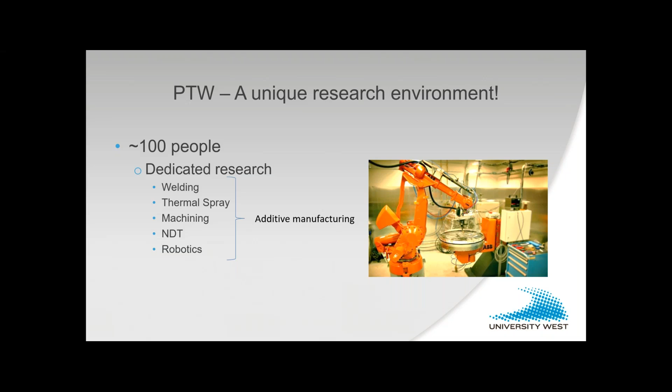The AM processes at University West are basically what you see here. We do a fair amount of laser metal deposition using wire as feedstock, but also with powder as feedstock, the blown powder process. Together with others, we have a fair amount of projects also on powder bed fusion based on the laser source. We have an in-house system on electron beam powder bed fusion, an A2X machine from Arcam, and we also do wire arc additive manufacturing, not least together with ESAB in Gothenburg.

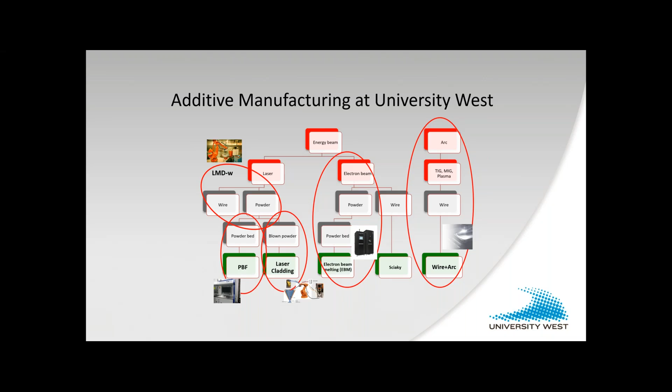Within our research environment, as I highlighted, we do welding-based AM as well as powder bed fusion. The welding-based AM is primarily direct energy deposition using either wire or powder, and we also do wire arc additive manufacturing. We also do a fair amount of testing to gain more fundamental understanding of what's going on during this type of processing, not only for welding-based additive manufacturing but also for the powder bed fusion processes.

With regard to the blown powder process, we have one key-ready system from Trumpf, as well as one system that we put together on our own based on gantry systems. At the moment, we have 2 PhD students working on the blown powder process.

A separate welding cell based on direct energy deposition using wire as feedstock is a process we started working on around 2006. At that time, we began developing this specific deposition technology on titanium, together with the former Volvo Aero, nowadays GKN Aerospace. GKN Aerospace actually developed the technology to the point where it's been flying for several years now. So that has been very successful.

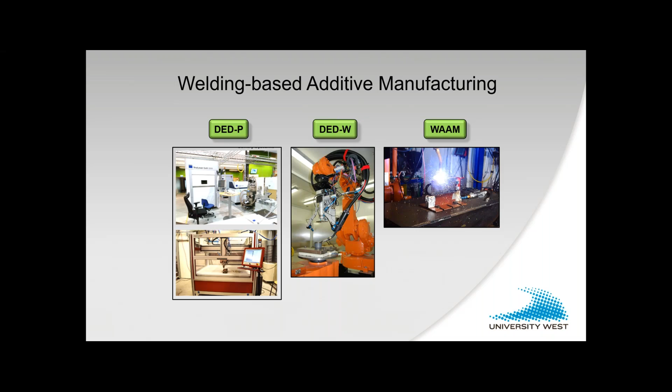As I highlighted just a couple of slides ago, we do a fair amount of testing, not least weldability type of testing. I believe you had a talk by Professor John Lippold in the Gleeble webinar series, and I'm sure he went through this, but we acquired a new Gleeble 3800D system, I think it was in 2016, and we've had several PhD students dedicated to this system. I'll touch on that later in this talk, but primarily with regard to strain-age cracking.

Another thing that is very close to my heart is Varestraint weldability testing. This is more or less solely dedicated to hot cracking - cracking mechanisms that could occur during welding. We are one of the few labs in the world who can do this type of Varestraint testing coupled to laser welding. So we do both laser-assisted Varestraint testing as well as arc-assisted Varestraint testing, and have several PhD students working on this.

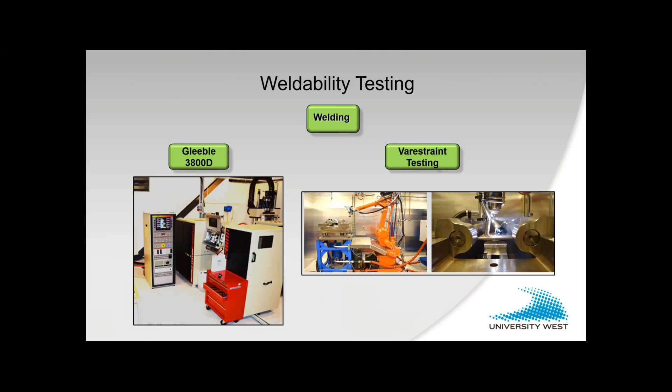For powder bed fusion, as I said before, we do both laser as well as electron beam powder bed fusion. At the moment we have two students working on the laser-based powder bed fusion, and about four students working on the electron beam process.

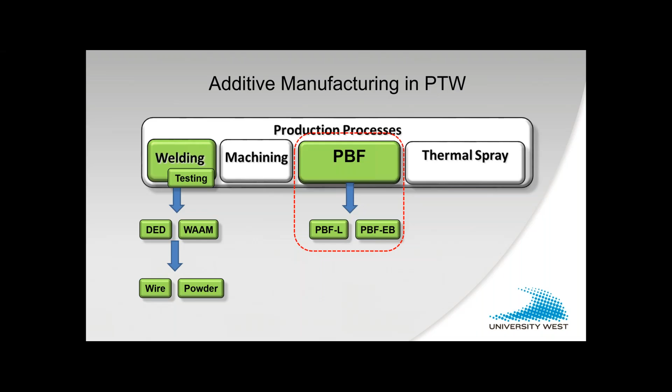The laser-based work is in collaboration with others, not least RISE, which is a research institute in Gothenburg, whereas we have an in-house system, an A2X machine from Arcam. For the powder bed fusion, both laser-based and electron beam, what we do is work primarily on the nickel-based precipitation hardening superalloys.

For the laser-based system, right now we have some work on the 247LC alloy, which is a very high precipitation hardened superalloy. For the Arcam machine, we do a lot of work on alloy 718, the workhorse within the aerospace engine materials.

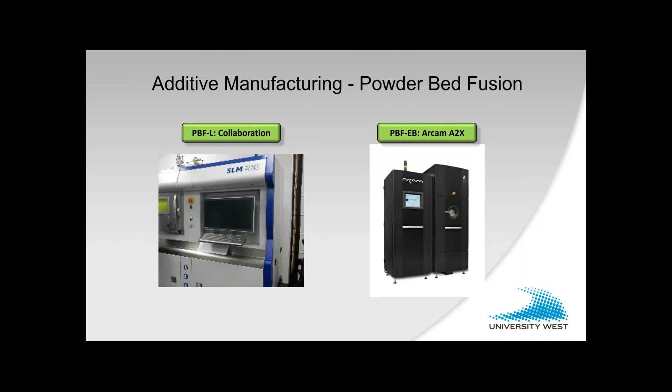So are there any interest in additive manufacturing? I guess the obvious answer is yes. If we check the number of publications versus years, we can see that there has been a tremendous boost in the amount of publications for additive manufacturing, exponential growth. So it seems like a lot of people are working on AM.

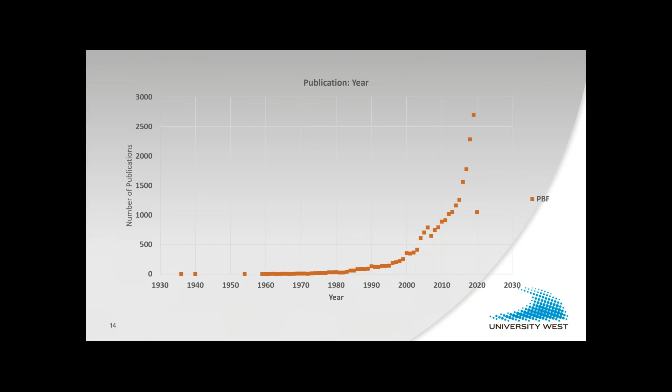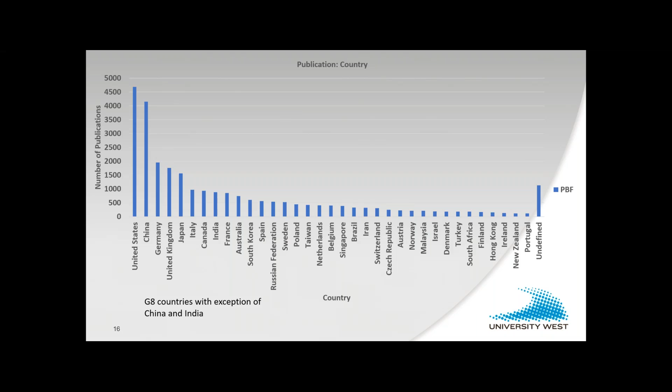But you might be aware of the fact that a big and promising market, not least for powder bed fusion, is aerospace. When you look at powder bed fusion as coupled to superalloys and compare that to the overall amount of publications within powder bed fusion, the amount connected to superalloys is significantly less compared to what's going on overall.

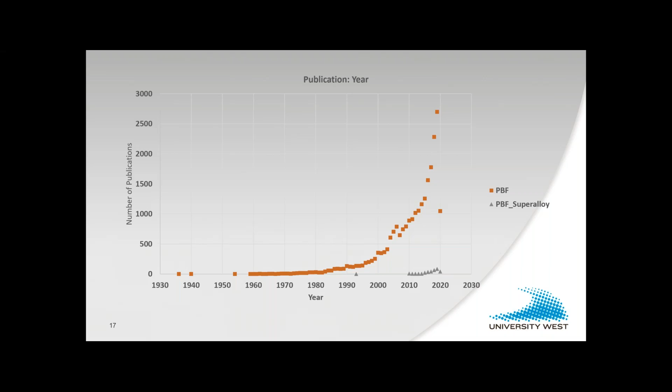But nevertheless, it seems at least to be a dramatic increase also in powder bed fusion connected to superalloys, as also seen for the publications or research carried out for all other materials.

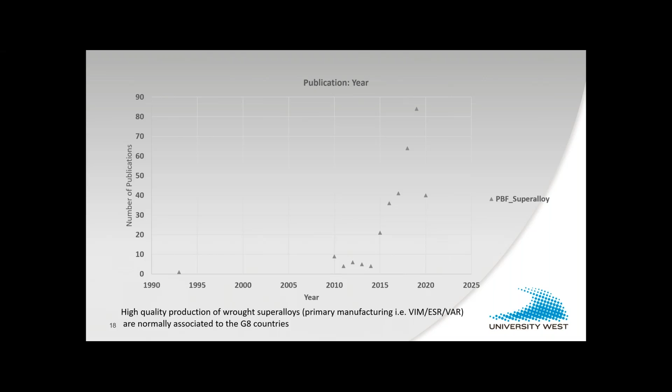If one considers or goes back historically to look at high quality production of wrought superalloys, which basically requires for critical components - let's say rotating turbine discs, etc. - we always require triple melt sequences regarding the primary manufacturing sequence, like vacuum induction melting, electroslag remelting, and vacuum arc remelting. These types of processes and production are also normally associated with the G8 countries. So this is actually true also for powder bed fusion connected to superalloys, but here with the exception of China and Sweden.

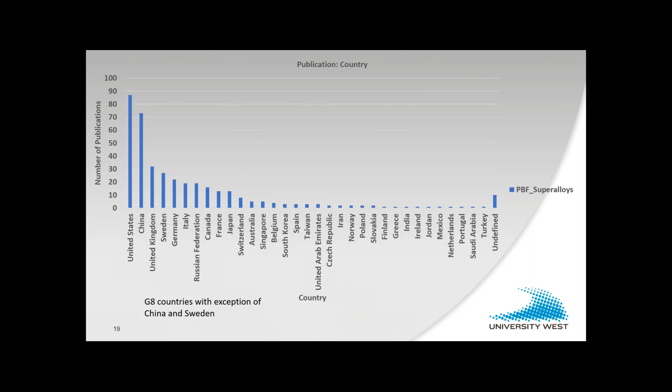An interesting thing I would like to tell you about is the history of powder bed fusion here at University West. Roughly 3 years ago, we decided to go all in, so to say, on research regarding powder bed fusion of the workhorse material 718.

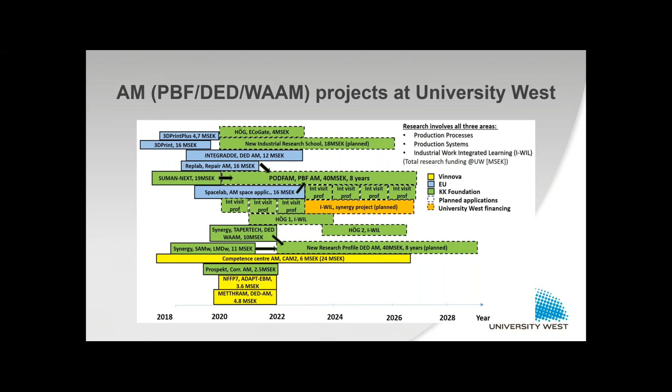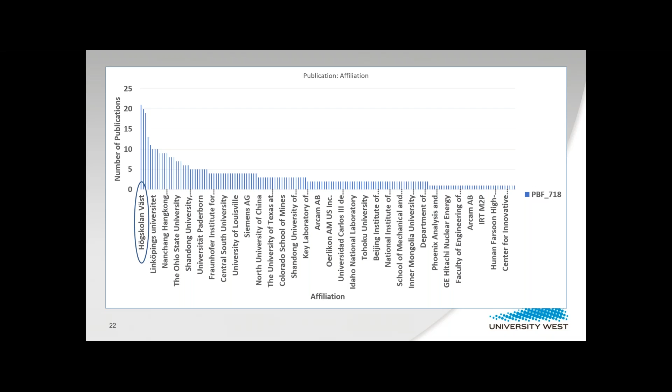So what are the drivers for additive manufacturing? Well, when considering aero-engine or aerospace applications, light and strong materials are required for a successful flight.

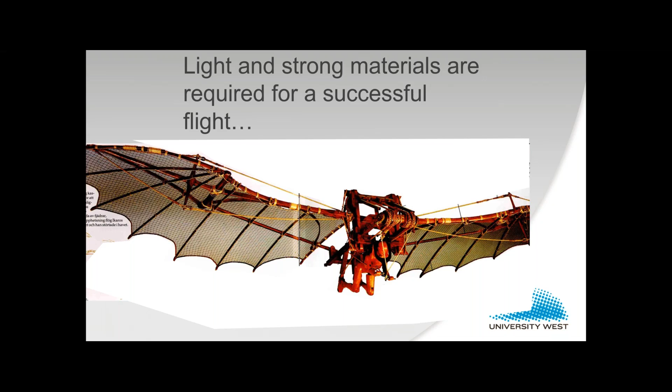There was one guy who figured this out many years ago and designed this machine. Maybe you know who it is—it was Leonardo da Vinci. He realized that in order to bring something up in the air, we need light and strong materials. The Wright brothers realized this too, but they were very lucky—extremely lucky—because the engine block they made for their engine was cast aluminium, and the material hardened by coincidence. That probably was one reason for their successful flight.

So light and strong materials are very important for aerospace. And a driver related to that is to make things hotter and better. If we consider superalloys, specifically the precipitation hardening nickel-based superalloys, one ambition is to use materials that can sustain a higher service temperature compared to the standard workhorse 718.

One way to accomplish that is to add more aluminium and titanium to the chemical stew. Aluminium and titanium push up the amount of hardening phase, specifically the gamma prime strengthening phase. The problem is that if you push the gamma prime content up too high, you get very bad processability, or a very high risk of cracking—not least strain-age cracking. So it's always a balance between service performance and processability when you develop a new alloy.

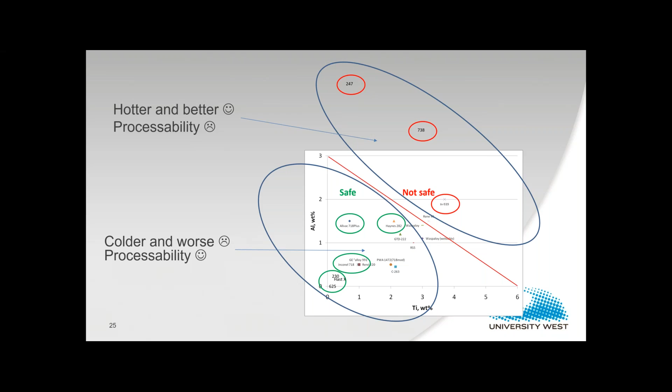Meanwhile, it also suffers from a fairly high temperature. But there is a lot of welding required to build this type of component—roughly about 60 meters of weld is needed to actually build it.

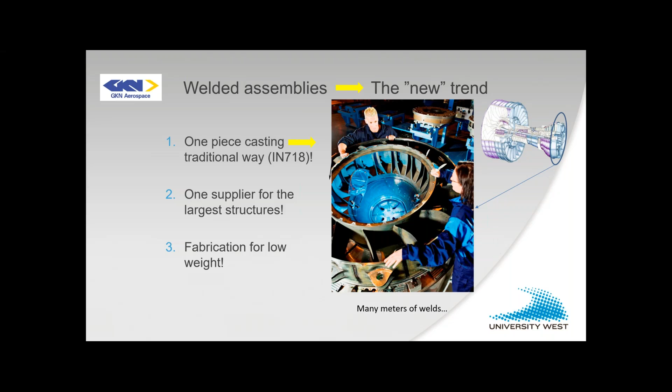But then another concept comes into play: every material form, like forgings or castings, has its inherent history and susceptibility to cracking, for instance. AM is also a new type of material form.

If we consider the size of the production chambers for powder bed fusion, we realize that the chambers are quite small, and we need to utilize welding to produce these larger components. So welding of AM-produced parts is extremely important, and that's an area which has not been really fully explored.

We recently had a student who graduated during the springtime, Tahira Rasa. She's now continued to work as a lecturer here at University West. She looked into restraint as well as Gleeble testing of AM-produced, powder bed fusion produced alloy 718.

We could see, for instance, that it's very important to connect the way you build the part, which will affect the grain morphology and grain orientation of the AM part. You need to think of the build direction and connect that to the weld preparation later, because the grain orientation and grain size significantly affect the weldability of the material.

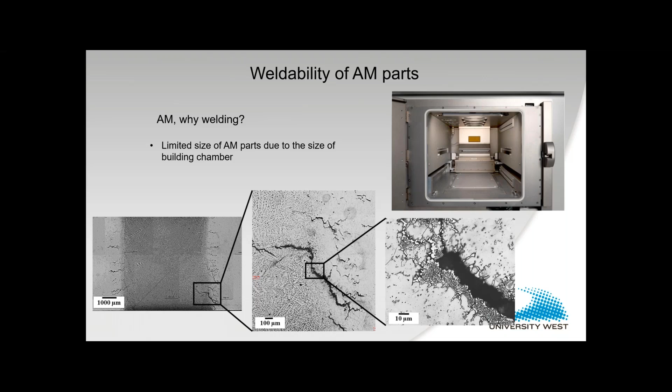That brings me to weldability, and I'm sure other speakers have touched on this before. Basically, weldability can be a bit arbitrary—you have to be careful when you use it, so you define what you mean by it. I stole this definition from the American Welding Society, which refers to three different categories.

The first is metallurgical capacity—basically how easy or hard it is to weld something without forming any deleterious constituents. The second deals with mechanical soundness, referring to how easy or hard it is to join or weld something without forming any discontinuities, pores, shrinkage, slags, or cracks. The last refers to serviceability—how the weld will perform during service.

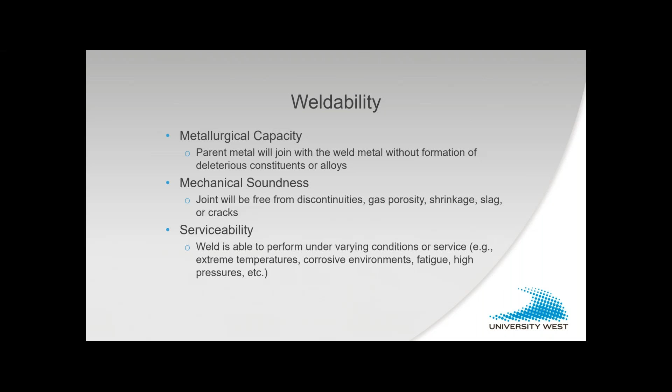From our research perspective, most of the research projects we have refer to weldability, and specifically to cracking susceptibility.

When dealing with cracking susceptibility in superalloys, it's primarily hot cracking that could be at stake during welding, associated with the liquid phase, as well as strain age cracking. Strain age cracking is also at high temperature, but it doesn't necessarily involve the liquid phase. Cold cracking could be a concern, but it's not a big issue with the superalloys.

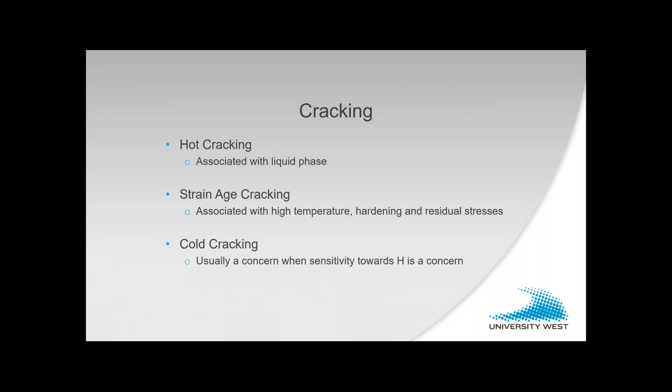So here today I will focus more on strain age cracking. Basically, strain age cracking is highly connected to the precipitation of hardening phases in the precipitation hardening nickel-based superalloys.

One could say that the standard grade alloy 718 was developed in the past because the industry suffered severely from strain age cracking in Waspaloy and other alloys, and demanded a new alloy with less propensity towards strain age cracking. Alloy 718 is more or less immune to strain age cracking, but that's because it's primarily strengthened by gamma double prime and not gamma prime.

Gamma prime is a precipitation hardening phase that precipitates very fast in the material, whereas gamma double prime takes much longer time in comparison.

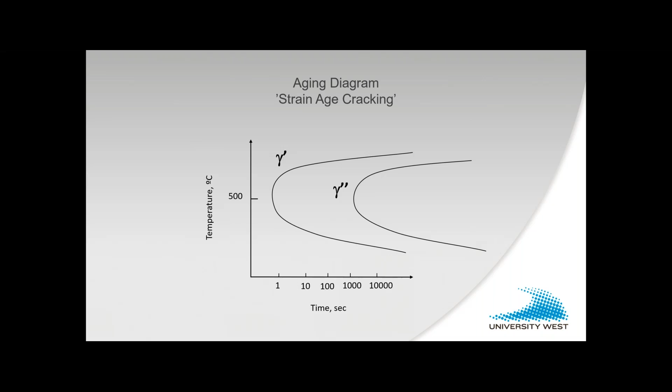As I said, alloy 718 is primarily a gamma double prime hardening alloy, whereas Waspaloy and Haynes 282, for instance, are gamma prime hardening alloys. One of the problems is that when you do post-weld heat treatment, you enter the precipitation nose of the gamma prime hardening alloys.

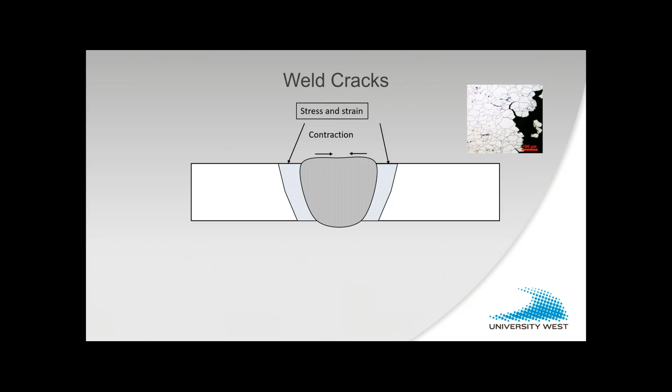As you weld something, you get contraction in the fusion zone, and this contraction in turn produces stresses and strains in the heat affected zone. During the post-weld heat treatment, you get hardening, and as a consequence of this, you might get cracking. This type of cracking usually takes place intergranularly.

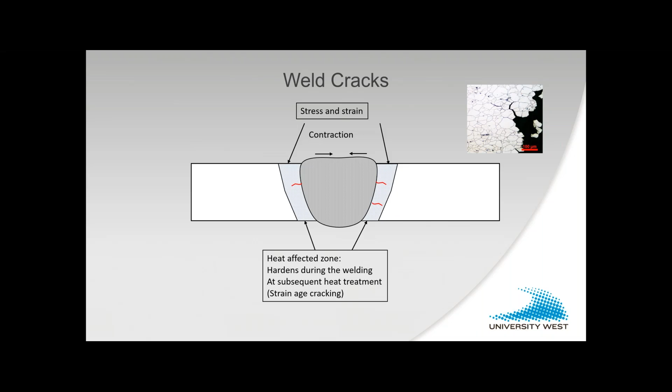There are various influencing factors regarding strain age cracking, and as I said, it's primarily something for the precipitation hardening alloys, but specifically for the gamma prime hardening alloys.

Aluminium and titanium are the two key elements regarding the gamma prime phase formation. The more you have of aluminium and titanium, the more gamma prime you have, and the higher the risk of strain age cracking. Carbon content has also been shown to have high importance.

Carbon is a carbide former, of course, and the carbide formation at the grain boundaries can sometimes prevent grain boundary sliding, which can be beneficial towards strain age cracking, as well as for ductility dip cracking.

Then there are other minor elements like sulfur, boron, phosphor, which also have some effect.

In terms of microstructure, grain size is the same as for hot cracking. Smaller grain size is usually beneficial because you increase the grain boundary area, which puts less demand on each grain boundary. Homogeneity matters too - for instance, castings are usually more susceptible compared to wrought materials.

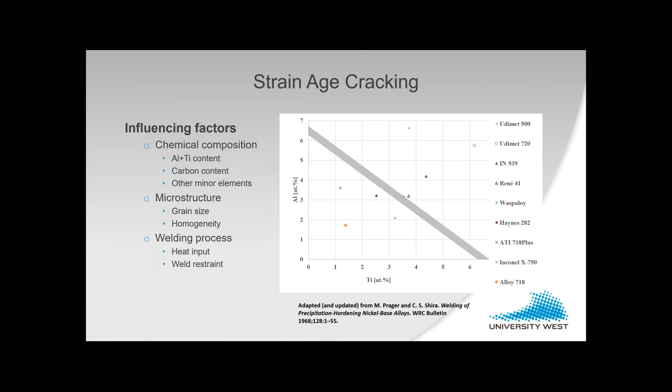When it comes to investigation of strain age cracking mechanisms, there are various routes to go. To make it fairly simple, one group belongs to the so-called representative type of tests, whereas the other belongs to simulative type of testing.

A recent PhD student of mine, Fabian Hanning, worked on this for five years, and he graduated during spring, and is now working as a postdoc in my research group. What we did there was to do an extensive amount of representative type of testing.

Representative type of testing is usually something which is easily done, but the problem is usually that it's hard to get fundamental insight into what's going on, or how to explain the actual cracking mechanism. So then the simulative type of test comes more handy, as a way to actually provide more insight into the fundamental root cause of the actual mechanism.

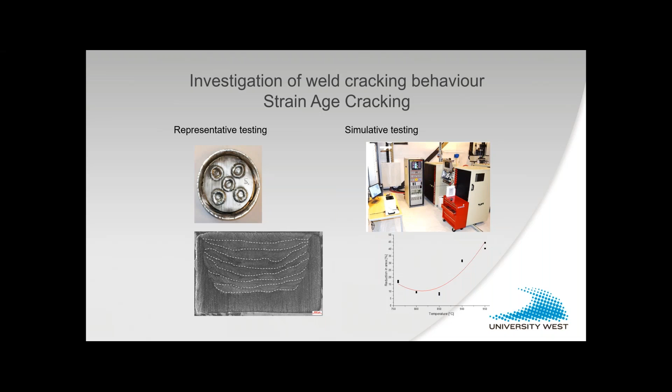There are different ways to assess strain age cracking also with the simulative type of tests, and a lot of tests have been developed using the Gleeble system. I think the most successful test has used the Gleeble system, but there have also been tests developed with the simple tensile test machine and halogen furnaces, etc.

The constant load rupture test is one test which has been used to predict strain age cracking, which is assumed to measure the time to failure. What we have seen in the literature, though, is that it does not predict very well.

Then we have the stress relaxation test, which is intended to give more insight into the ongoing mechanisms. But the problem with this is that it's quite hard to provide material rankings with this type of method. They are quite tricky to perform.

And then we have stress to fracture tests, but these tests do not really indicate any resistance towards strain age cracking. You might have a material providing high stress during fracture, but it doesn't say anything about the susceptibility towards strain age cracking in general. My favorite are the tests referring to measuring of ductility.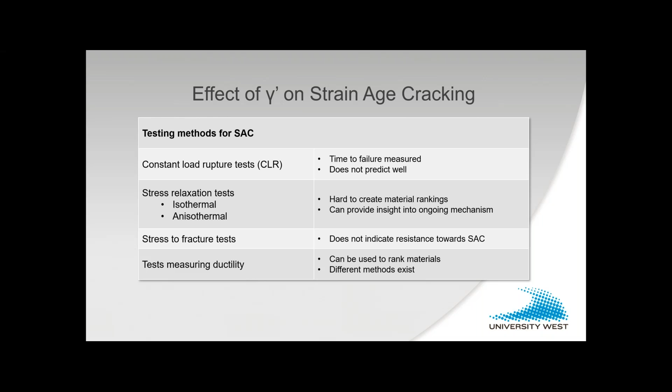Quite some years back, I saw a test - I think it was Metzler at Haynes International who developed it - and he did really nice work where he ranked different superalloys. Basically, what he did was to...

simulate a post-weld heat treatment cycle. What you do is have a slow heating up to a certain test temperature or soak temperature, and then you slowly pull the sample to fracture, and then you measure the reduction in area and plot that versus the test temperature.

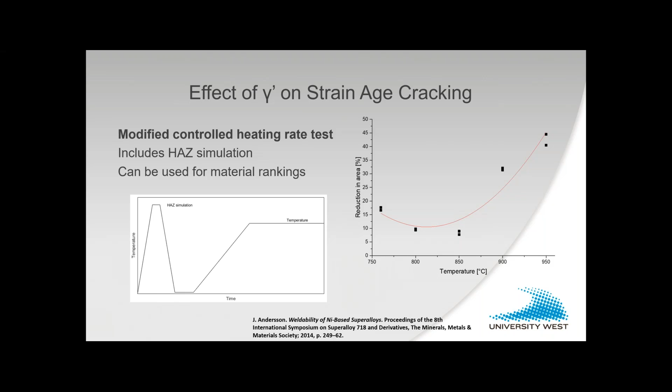What I added to Metzler's test was a heat affected zone thermal cycle, because I thought of the importance of actually liquate the grain boundaries in the heat affected zone before you do the actual post-weld heat treatment. So this gave us a tool to make very good rankings of various alloys as well as heat treatments. But to be honest, it does not really provide very good understanding for the root cause to strain age cracking. Benefits were that it was very easy to use this type of test, and the relative performance rankings between different materials were good.

But as I said, no insight to the actual mechanism, like the influence of precipitates, and accounting for heating rates and exposure times becomes a bit tricky.

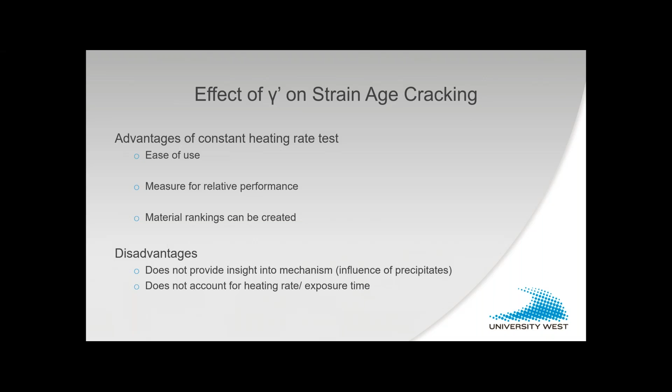So Fabian Hanning developed a new test where we decided to - I have a video here that I will show you. Basically, we have the sample, and instead of a slow heating rate, we heat up in a very fast manner, and then after a certain exposure time or dwell time, we pull to fracture.

By doing this, we could vary not only the test temperature, but also the dwell time or the test time, to systematically investigate what happens as we change test temperature as well as exposure time, to get more insight into what's going on in the material. So here are some results we did on Haynes 282, which is a reasonably newly developed superalloy. To the left-hand side, you can see the reduction in area versus test temperature with varying exposure time. We can see that by increasing the exposure time, ductility drops.

And the ductility drop is most significant for temperatures 850 and 900 degrees C. We can also couple that to the strength of the material, in this case, hardness. We see an increase in hardness by increasing exposure time at these different temperatures. So ductility decreases as a function of exposure time, and that correlates to the onset of gamma prime precipitation.

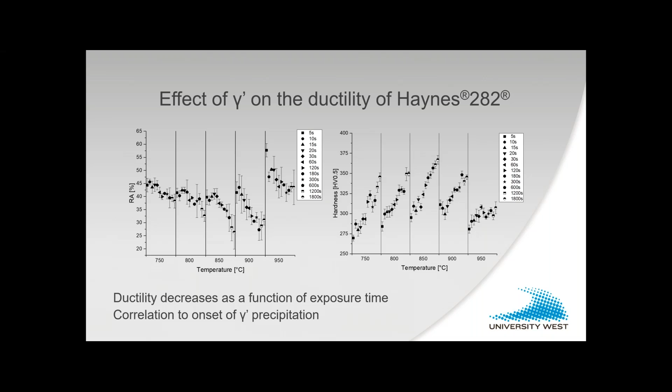So to summarize, fabrication of aero-engine and specifically hot structural components is very complex. AM can be seen as an enabler, but it also adds complexity. There are a lot of different thermal profiles that can be complex and create a lot of different phase reactions during processing. And most of the research on powder bed fusion is carried out in the G8 countries, with few exceptions: China, India, as well as Sweden.

Jumping from AM to strain age cracking, what we can conclude from our research as well as from the literature is that weld restraint and precipitation-induced stresses have a significant impact on strain age cracking, as well as on the ability to relax residual stresses. The kinetics of the hardening phases is influenced by the chemical composition, as well as the dislocation density, which in turn affects susceptibility towards cracking. And fine grain size is very important - finer grain size is beneficial. We saw this very clearly in the research we did, and that is in general true also for hot cracking.

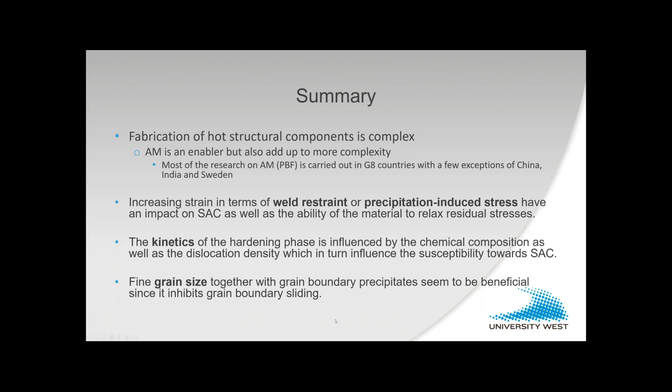But then, just to round off this Gleeble talk - is there any future for Gleeble? I hope you don't lose your breath now, Brian, but it seems quite promising.

When we look at the amount of publications for Gleeble, we can see that it's increased quite dramatically over the past years. I just searched for Gleeble and you see that we reached almost 500 publications a few years back. If we combine Gleeble and welding, we can divide the Gleeble publications by 10, and then we get roughly 50 publications annually for the last year.

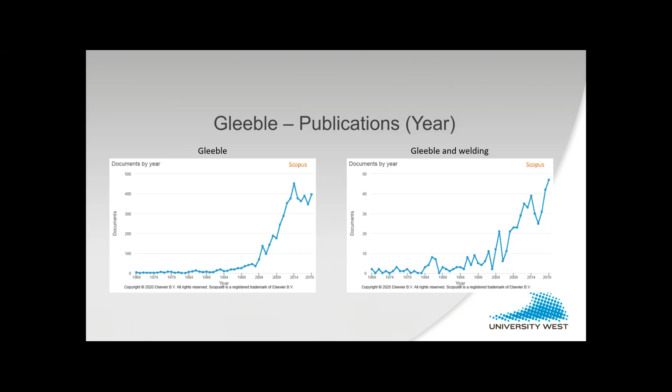If we look at the amount of publications for different countries, you can see that China is the country producing most of the publications by far. If we combine Gleeble with welding, we can see that the US gained some publications on China, but China is by far the biggest country.

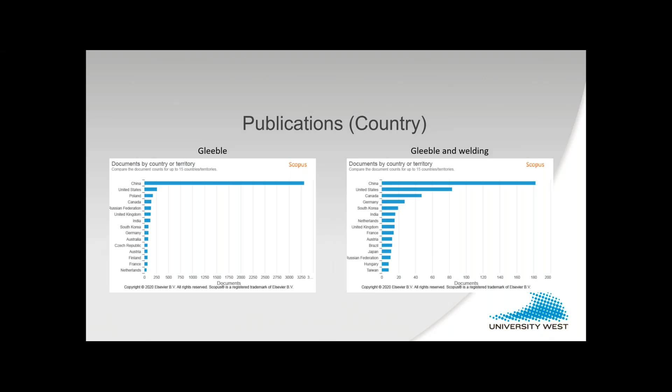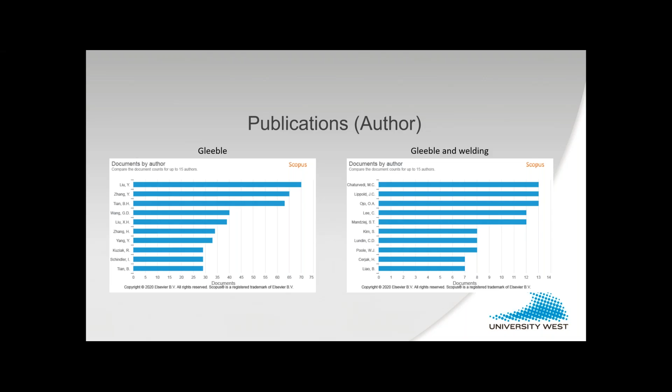Looking at the different authors, I believe most of the authors on the Gleeble publications are from Chinese affiliations, but for Gleeble and welding, they are a little bit more spread on the globe. So it seems like Gleeble has a great future. I think that's a nice way to end this talk. Thank you very much.